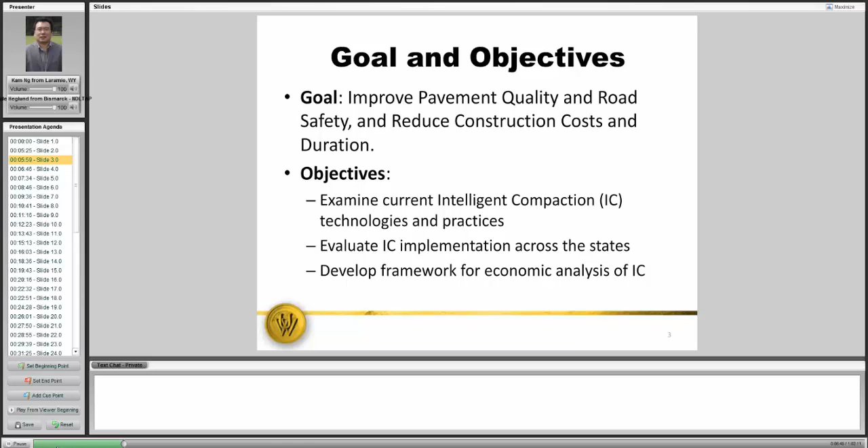A very brief background: current road compaction methods are highly operator dependent. Some of the limitations of current road compaction methods and procedures include that roller passes are often inconsistent, and as many of you know, current road compaction quality control and assurance is performed using a point load test method. The coverage of the quality control and assurance is minimal—I would say less than 1% of the roadway section.

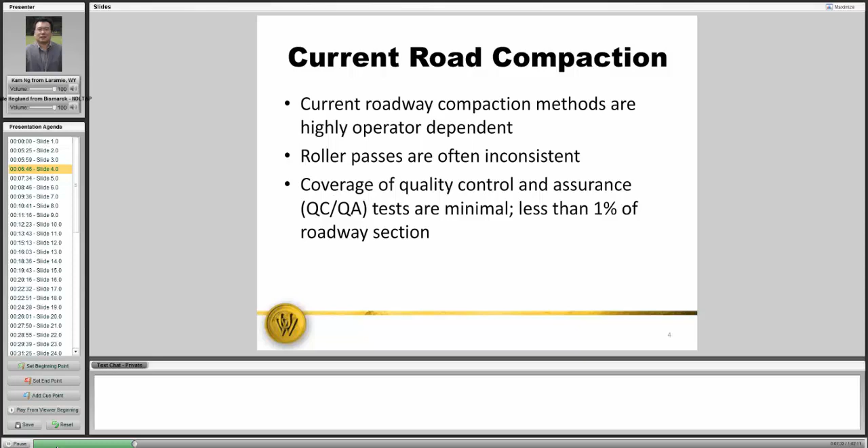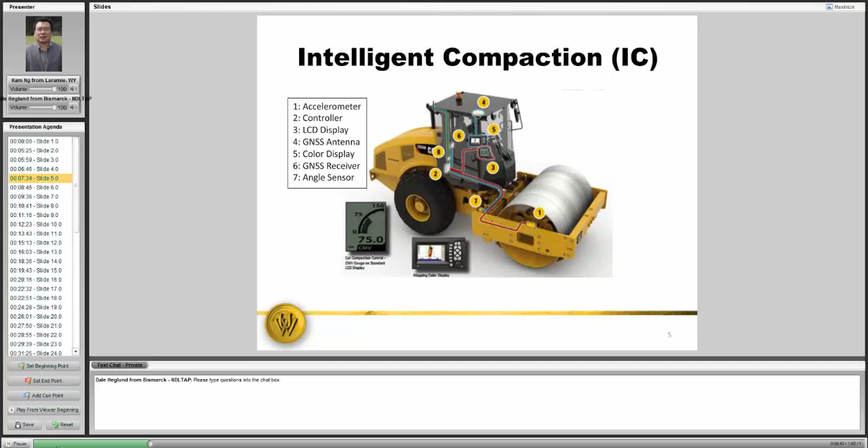So what exactly is intelligent compaction? In order to have an intelligent compaction, the compactor roller must be equipped or installed with the following features and sensors. Most important is an accelerometer that measures soil stiffness as the roller is compacting and rolling over a road section. We must also have a controller to adjust the compaction vibration, and have the data displayed using an LCD display, to locate the measurements at specific locations. We use a GPS system with a GNSS antenna to collect GPS information and overlap it with the measurements collected by the accelerometers, and that information is displayed. The roller could also be installed with angle sensors to measure rotations and positions of the roller.

Having these features and sensors installed onto a roller provides three main characteristics of intelligent compaction. The IC allows us to perform continuous assessment of soil and pavement stiffness. Roller operation will be automatically adjusted in terms of vibration amplitude and frequency, and the integrated GPS will allow us to have real-time mapping of the stiffness, as shown in the figure, where we were able to cover the entire area to indicate the measurement values at respective locations.

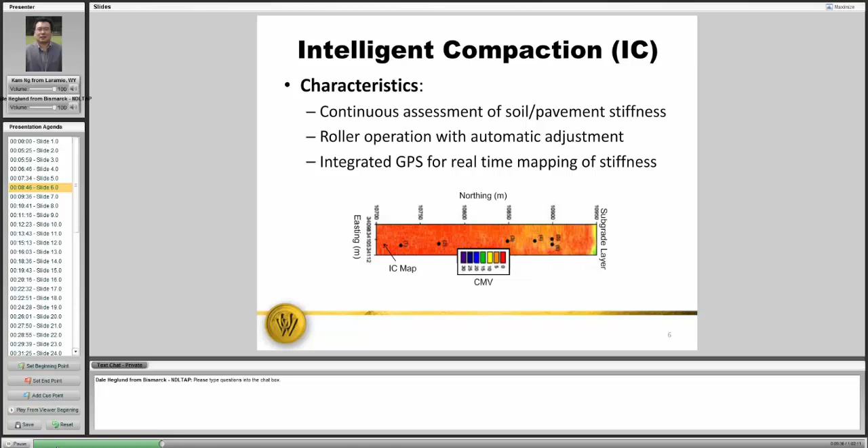Some of the potential benefits of intelligent compaction are gathered from the literature review of our study. Higher quality compaction, we believe IC will provide higher quality compaction, will improve construction, and most important is roadway safety, improve coverage for QA and QC testing, improve roller pass consistency, and reduce construction and maintenance costs as reported in the literature.

This figure shows what IC can do in terms of measurements compared with current compaction and QA/QC methods. IC is able to cover 100% of the compacted sections, whereas current point load test methods cover less than 1% of the quality of the road sections.

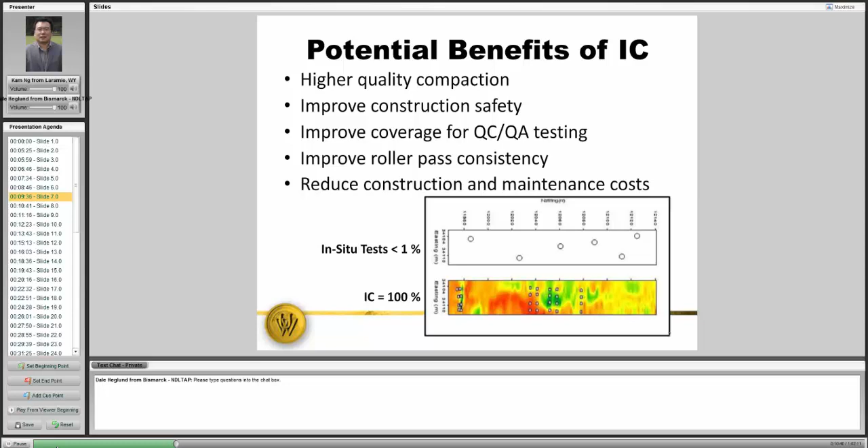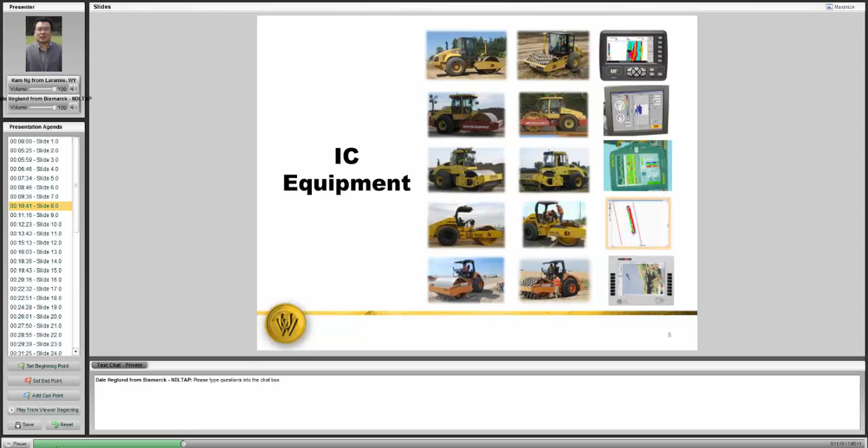This is not a technology designed by just one company; many different companies have their own systems, software, and measurement values. Some typical companies or vendors that provide this intelligent compaction technology include Caterpillar, Dynapac, Bomag, Sakai, and Case, just to name a few, and they have their own design, display features, screens, and measurements, as summarized on this slide.

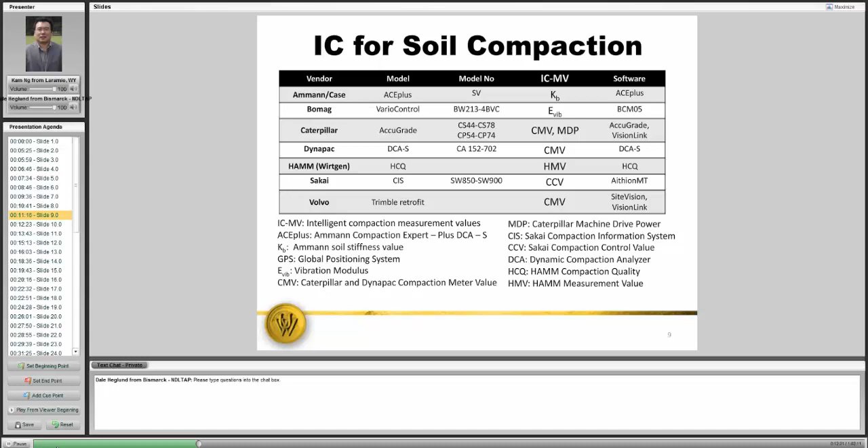A table shows different vendors, different models, and different software used to collect and process the data. Most important is the column under IC-MV, the intelligent compaction measurement values. The measurement values collected during compaction vary from vendor to vendor, but primarily measure the stiffness or modulus of the compacted soil or pavement material. The details of those calculations and derivations have been clearly and explicitly described in NCHRP report 676, so I will not get into those details here. This has been studied by many experts and summarized in the NCHRP report.

In terms of the compacted or influence zones under a compactor roller versus some of the typical point load test methods...

There's a question about maximizing the button above the slide to show the presentation full screen. Chris or Dale, would you be able to do that? Each person can do that on their own.

Okay, all right. In terms of the zones or influence depth, the compactor roller using intelligent compaction can cover a width of 2.1 meters, and a depth of 1 to 1.2 meters, whereas other point load tests, for example the LWD or FWD, will cover a depth of only 0.3 meters. Other gauges like the nuclear density gauge will cover a depth of 0.3 meters or 12 inches. For the DCP, of course, it's a point with no width, and the depth can go as deep as 3 meters.

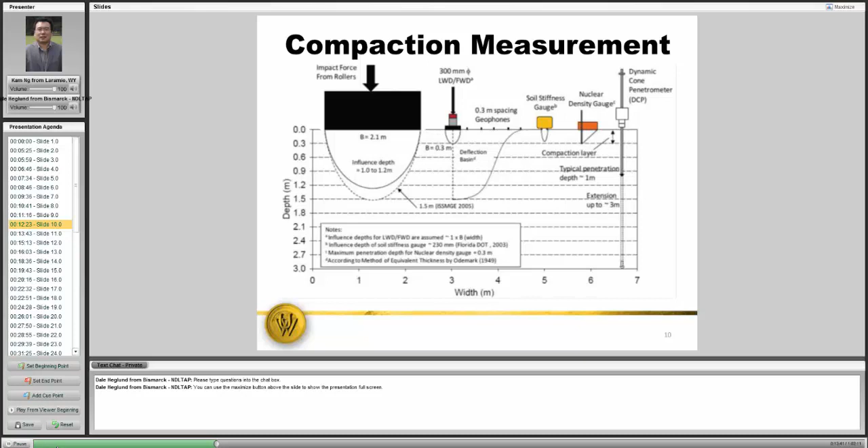So if you use intelligent compaction and collect a lot of data onto your onboard computers, how do you compile, analyze, sort, display, and process the data? You definitely need a data management tool, a program we call Veta software, funded by the Minnesota Department of Transportation and developed by the Transtec Group.

I've included the link at the bottom that you can use to download the software for free. Basically the software allows you to upload and download the data from the onboard computers on the roller down to your computer for analysis. With the data, you can generate a map of compaction data, perform correlations of the measurement values with in-situ test data, determine sections that meet the QA/QC specifications or target value, and better evaluate the performance of the compacted sections using this software.

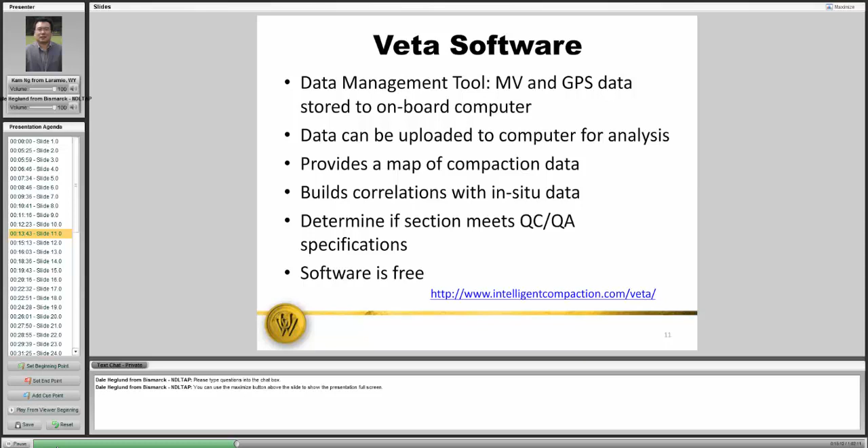So these are some of the outcomes of our study. Starting here with the current compaction specifications, as many of you know, today we still use some very conventional methods to evaluate compaction. For soil and aggregate layers, we typically use a nuclear gauge, proctor densities performed in the lab for reference, and sand cone as a reference test method. For pavement, we could have cores for testing, nuclear gauge, non-nuclear gauge, or electric density gauge for measuring and determining the performance of the compacted sections.

So what other DOTs have been doing with the implementation of intelligent compaction is using it as a complement to the current methods. They still use the current test methods like the DCP, sand cone, and nuclear gauge for their QA/QC, whereas IC will be used as a complement depending on the option.

There are three main options to integrate or incorporate IC into the QA/QC, described in detail in the NCHRP 676 report. The authors are Michael Mooney and his group, and David White and his group, among others who worked on that report that clearly describes all these details.

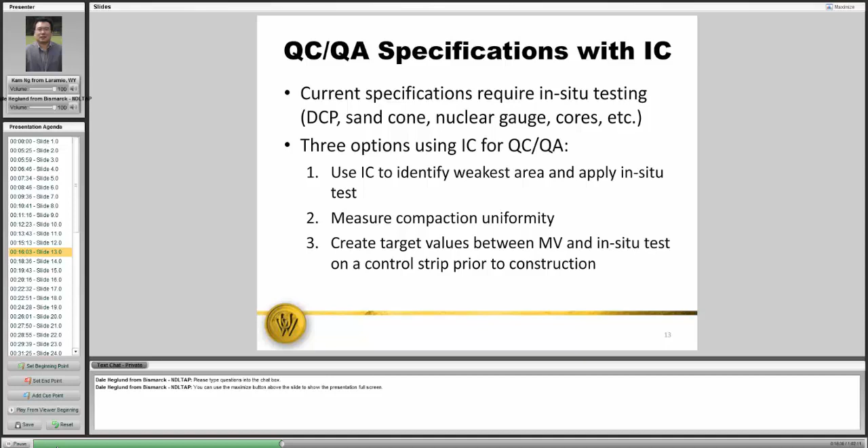So that's more extensive in option three, but you have a choice of three options to integrate and incorporate intelligent compaction into the QA/QC.

In terms of IC specifications, FHWA has developed specifications for use by transportation agencies, and at the time we conducted the research, these were being adapted into AASHTO specifications. I checked, and AASHTO has come up with specifications, which you can go to the website to purchase regarding intelligent compaction.

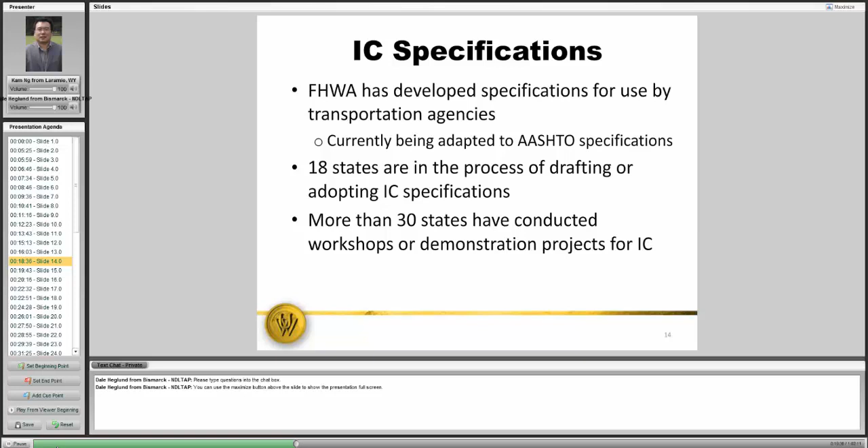As for the study, in 2014, 18 states were in the process of drafting or adopting IC specifications. I believe today there are more than 18 states. At that time, more than 30 states had conducted workshops or demonstration projects for IC. I believe today there are more than 30 states.

So we'll get into the research outcomes. First, I'd like to share the outcomes of the Wyoming survey, which had a total of 79 respondents participating.

We gave them a list of questions and answer options to choose from, and I want to bring up this particular question: do you have any concerns with IC or IC implementation? The answer options included cost, reliability of the data, reliability and durability of the technology, no specified quality control assurance method, lack of operator ability and/or time and cost to train operators, unfamiliar with the technology, no concerns, or others.

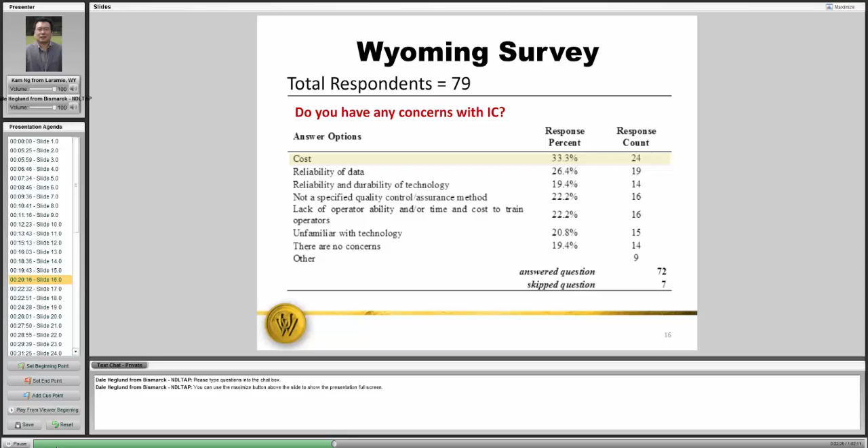This particular outcome is to understand DOT knowledge and use of intelligent compaction. The question was: which aspects of intelligent compaction is your agency familiar with? Select all options that are applicable. The highest percentage, 90%, meaning 27 out of 30 participants, selected that they are familiar with the technology used during intelligent compaction.

The next percentage is 76.7%, with 23 participants familiar with the operation of intelligent compaction rollers. Continuing, 56.7%, or 17 participants, are familiar with quality control and assurance standards. The lowest percentage is 50%, with 15 out of 30 participants familiar with costs and benefits. I want to highlight that they are least familiar with the costs and benefits associated with the use of intelligent compaction, especially the cost.

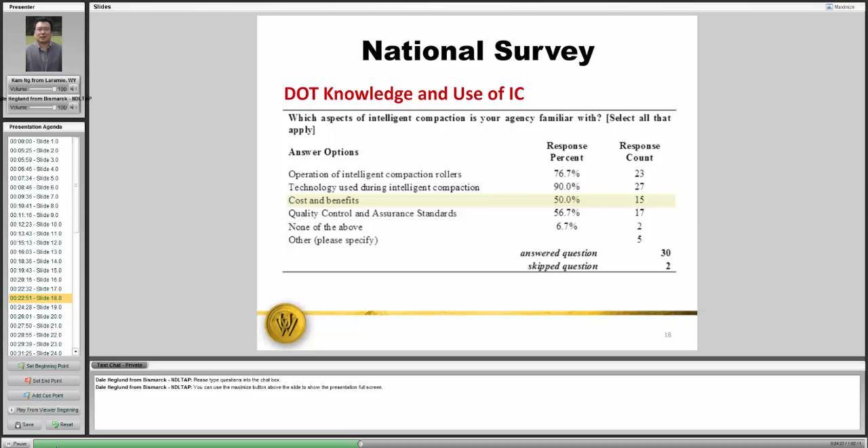Another question is to understand the DOT concerns about using intelligent compaction. The question was, does your agency have any concerns with the use of intelligent compaction for soil or pavement materials?

With 29 participants, the highest concern is 41.4%, which is the ability to have it approved as a quality assurance technique by the policymakers, and the lack of staff knowledge to confirm the data. These are the two highest percentages reflecting the major concerns with using intelligent compaction, followed by reliability of the data and the cost. Those are several other concerns with DOTs using intelligent compaction.

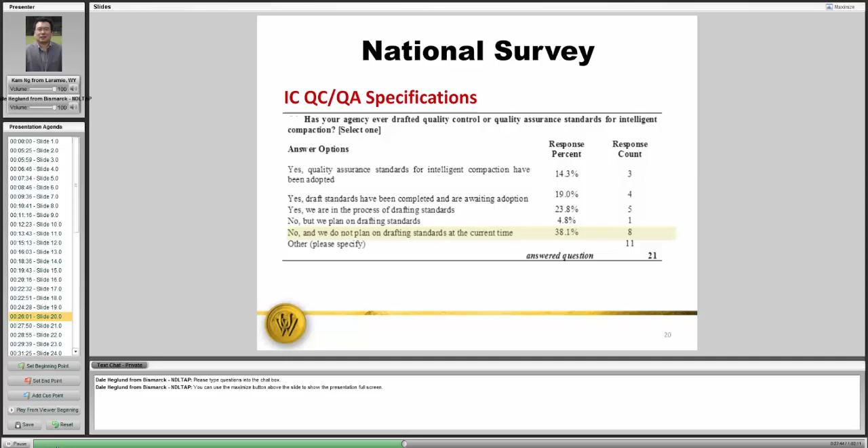But if you add up all the participants that answered yes, combining those groups, a total of 12 people say yes, but either in the process of drafting, adoption, or implementing the QA/QC specifications.

The first group, 31%, or 10 out of 32, believe that the cost will increase. The other group says they're not sure whether the cost will increase or decrease with the implementation of intelligent compaction.

From this outcome of the survey we understand that more than one third have no information or knowledge about the cost, and about one third of the people believe, or have information, that the cost will increase.

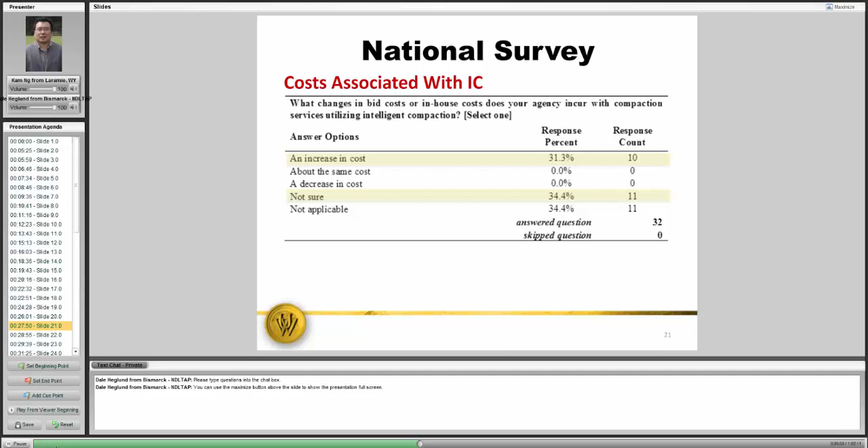Particularly regarding the cost associated with intelligent compaction, only 3 respondents mentioned information related to the long-term cost. So they have information on the long-term cost, and in particular one respondent from Texas indicated that over the long-term period, the benefits yield higher than the cost.

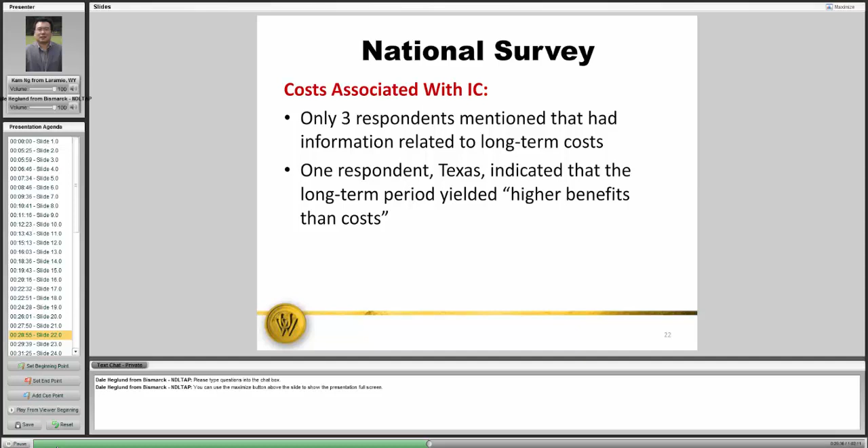That's good news for the full implementation of intelligent compaction, so we need to look not only at the initial cost but also at the long-term cost to be considered in our economic analysis.

Based on the outcomes of the survey, we understand that there are people concerned about the cost, and people with no information about the cost, and we think this is one of the major factors that will hinder the implementation or adoption of intelligent compaction.

We searched through literature and found limited or no studies on the benefits and costs associated with the implementation of intelligent compaction, and we felt this is an important topic to address.

So one of our focuses or objectives is to develop a framework for economic analysis of intelligent compaction, so that transportation agencies can use this as their basis or foundation for future investigations about the costs associated with intelligent compaction.

The framework addresses two main components: construction cycle and cost, and also the roadway life cycle. To present the framework and facilitate its presentation for economic analysis, we present two case examples to show how we use this framework to calculate the costs and benefits: case example 1, pavement overlay, and case example 2, new road construction.

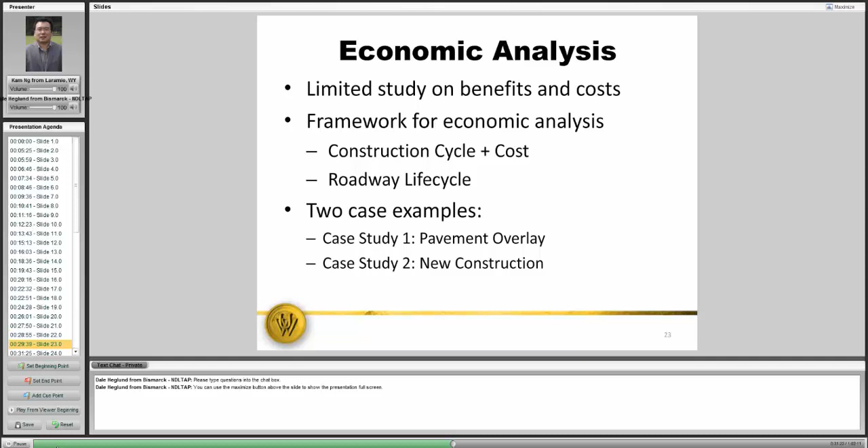Before I get into the framework and the examples, I'd like to define some of the terminologies or equations that we use in the calculations. Construction cycle is defined as the time period that begins with the preparation for roadway construction or compaction. So this is our definition for construction cycle.

For construction cost, we have an equation to determine the construction cost, listed as equation 5.1 in the report. Basically it is the compaction time in hours.

The compaction time in hours is multiplied by the cost of the roller per hour, plus the operator cost per hour, plus the GPS cost per hour considering the IC technology, and finally plus the QA/QC cost per area multiplied by the total area. This is the basic equation that should apply to everybody, because you will definitely have costs for the roller, operator, GPS, and QA/QC. That's how we define the construction cost.

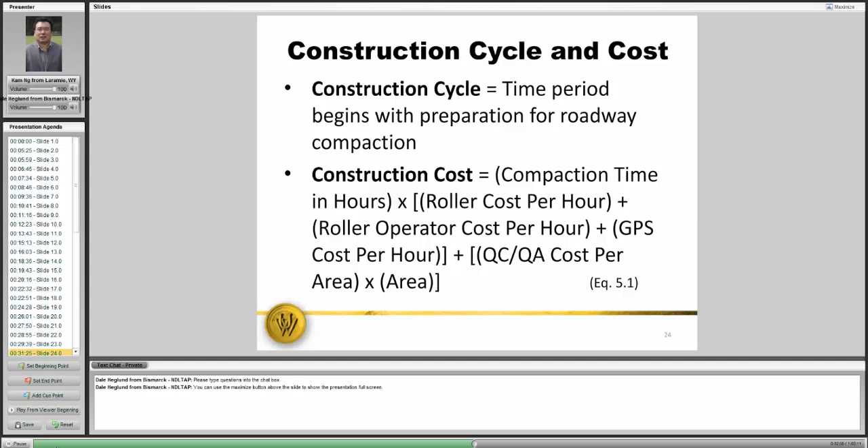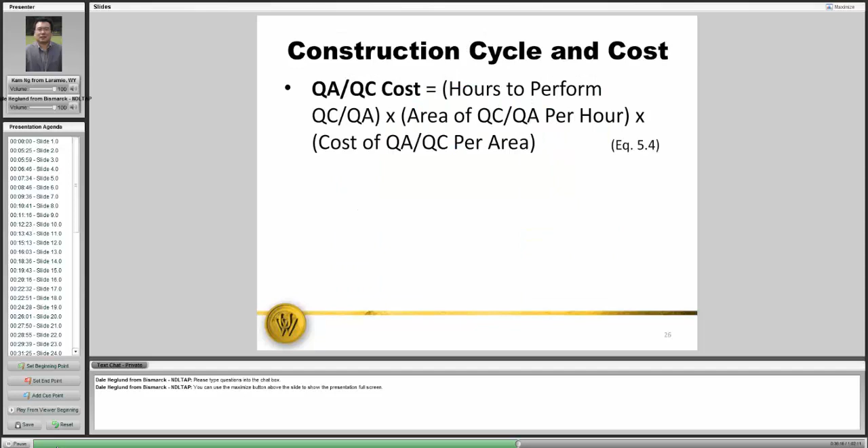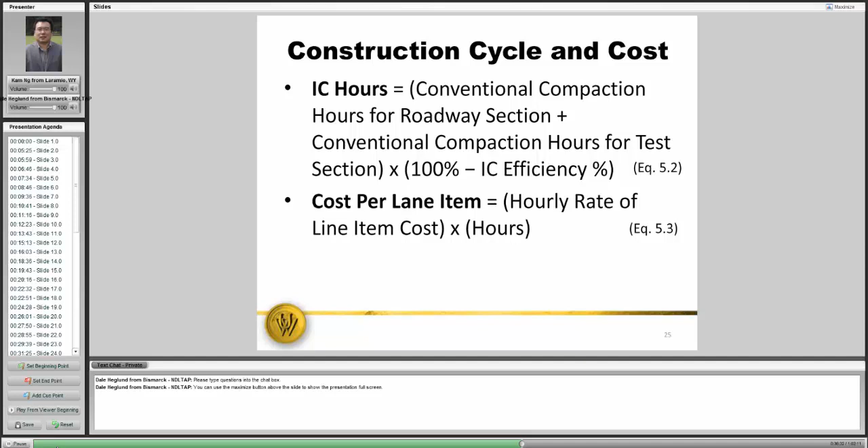To calculate the number of hours required by intelligent compaction for the same 1 lane mile, we need to use equation 5.2, which is the IC hours. The IC hours is the amount of hours required by conventional compaction multiplied by 100% minus IC efficiencies. That's how we get an equivalent number of hours required by intelligent compaction.

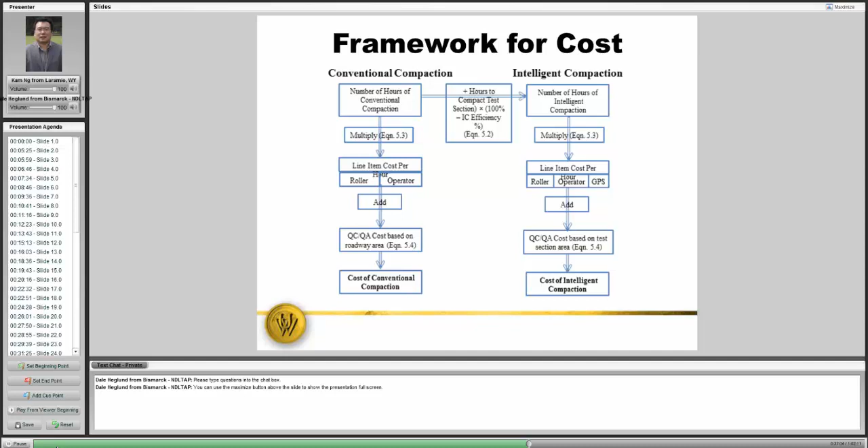Again, once we have the number of hours, we multiply by the cost for each line item, and we add the cost of QA/QC. That gives us the total cost required by intelligent compaction. So that's the flow chart that describes how we're able to determine the construction costs for both conventional and intelligent compaction.

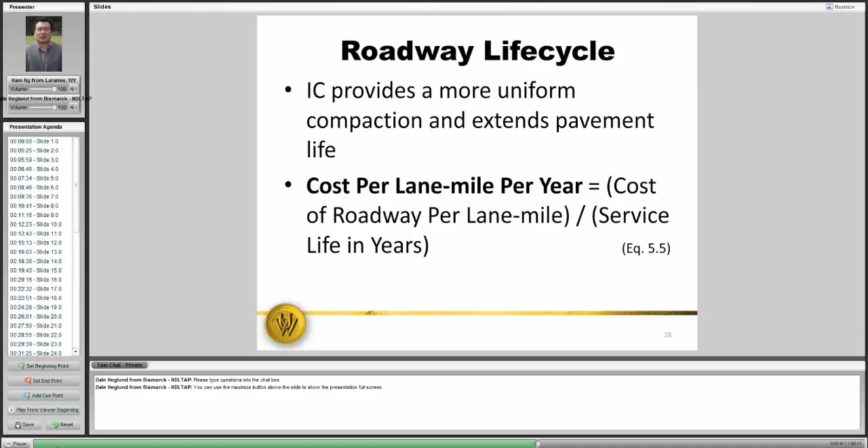In terms of the roadway life cycle, we also need to consider what would be the benefit, in terms of cost, based on the life cycle, the service life of a road. We believe that IC provides a more uniform compaction and will extend the pavement life. So the cost per lane mile per year is the unit used for comparison, equal to the cost of the roadway per lane mile divided by the service life in years.

So we begin with example number 1: a 2-inch thick asphalt pavement overlay, a single lane mile with a 500-foot IC calibration section. One of the challenges was to gather cost data so that we could perform the cost analysis for these examples. We gathered the cost data from companies, contractors, from Wyoming DOT, from equipment manufacturers and rental companies, and from literature, which allowed us to have enough cost data to perform the task.

Another challenge is to determine what will be the IC roller efficiency. We found this document by Briaud and Seo from Texas A&M, which concludes that the IC roller efficiency will be 30%.

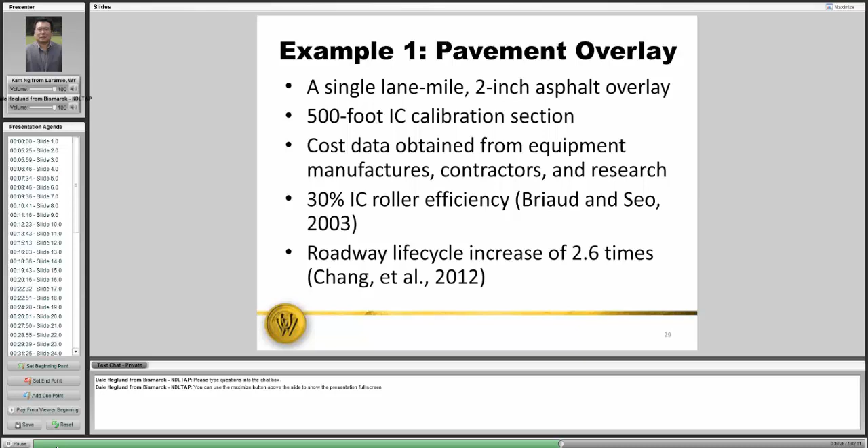The roadway life cycle compared with the roadway life cycle using intelligent compaction will increase by a factor of 2.6 compared to the roadway life cycle compacted using a conventional method. From Chang 2012, we're able to get this number to show that the life cycle of a road compacted using intelligent compaction will increase by a factor of 2.6.

Specifically, I want to highlight that the conventional roller cost for compacting a pavement layer per hour is $36. That's the number we come up with. The IC pavement roller cost or rental cost per month is $7,500. Roller operator per hour we estimated to be $30 per hour. That's the cost of an operator.

The amount of hours for performing the conventional compactions per lane mile is 10 hours. Compaction cost per square yard is 4 cents, and GPS rental per year is $1,800. We assume test sections of 500 feet, and we also assume 40 working hours per week. That will be the required cost data for construction cost estimations.

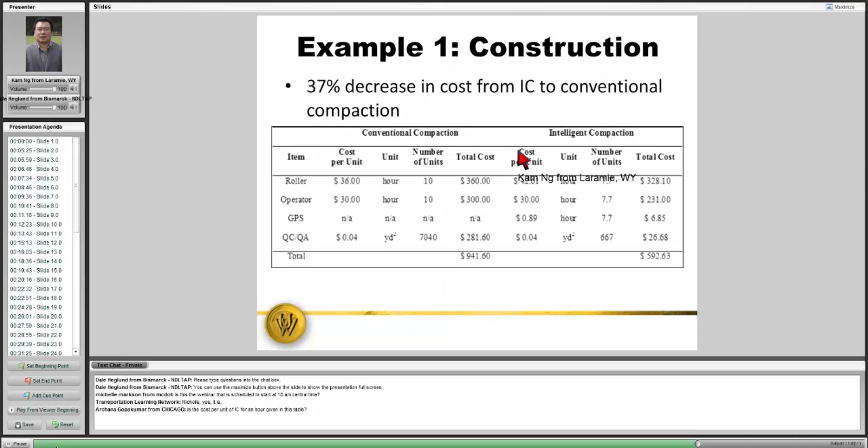Let me continue with the roadway life cycle. We gathered information from WYDOT and other agencies and estimated about $250,000 for overlaying a 2-inch thick asphalt pavement. So we take the $250,000 divided by the service life of the road, and we end up with $25,000 per year. That's how we calculate the cost per year associated with a 10 year life cycle.

If we use intelligent compaction, based on the Chang 2012 documents, they believe the service life will increase by a factor of 2.6. So we take 2.6 multiplied by the 10 years of the conventional method. We believe the service life will extend to 26 years if the road is compacted by intelligent compaction. That's how we get 26 years for the roadway life cycle.

Again, the cost per year takes $250,000 divided by 26, and that's how we get the cost per year. So if you compare the cost per year, we can say that we save about $15,000 per year in terms of benefit or saving using intelligent compaction.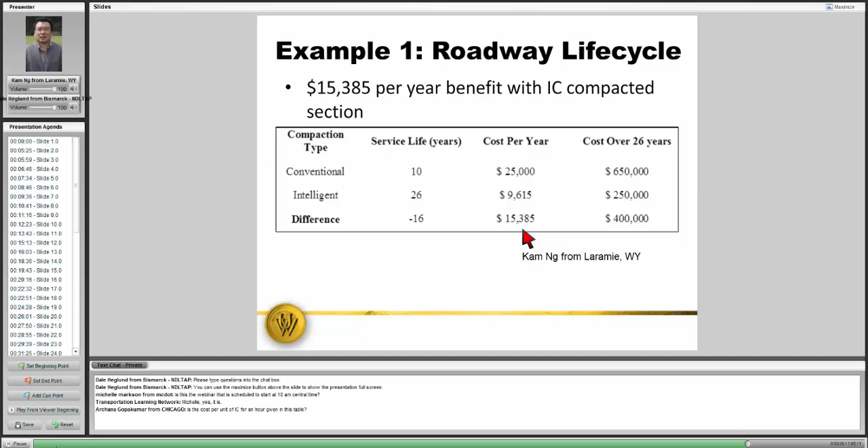So based on this study, example number 1 with a 2-inch thick overlay pavement, we have a saving of about $15,000 per year. But people may argue there are some uncertainties in terms of the numbers, the IC efficiencies, and the extended life cycle. So we did some sensitivity studies or parametric studies to look into a range of values.

In other words, if you don't have an efficiency gain using intelligent compaction, we believe you still have some savings, primarily from the QA/QC sections. If you assume you only do tests on the 500-foot test section using the point load test for establishing target values or correlations for the entire roadway, that is the saving you have using intelligent compaction. So even if you don't gain any efficiencies in terms of hours, using intelligent compaction you will have a cost saving based on this study.

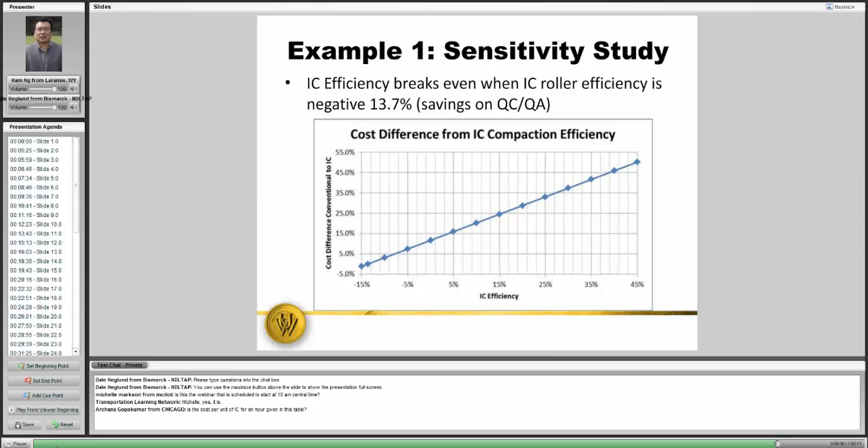The report also includes other sensitivity studies on roller compaction rate, on different extended life cycles, and on other parameters that we believe will change from place to place.

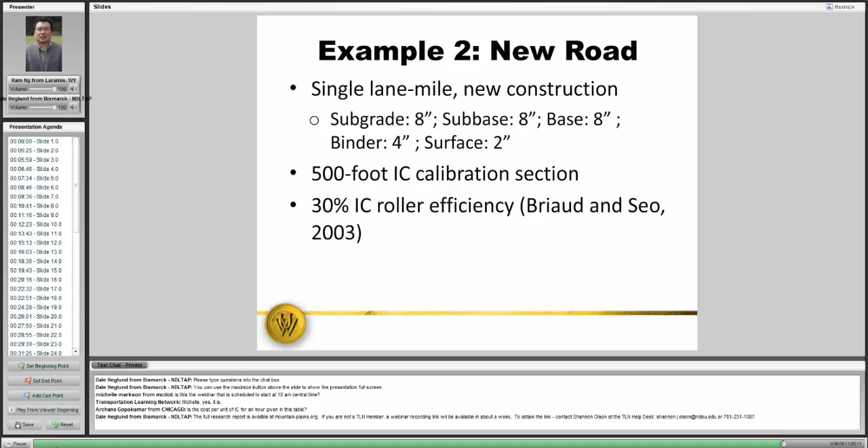Now we get into example number 2, where we have a single lane mile new construction. We have 5 layers here: subgrade, subbase, base, binder, surface. We have 500-foot IC calibration sections, and again we'll use a 30% IC efficiency here.

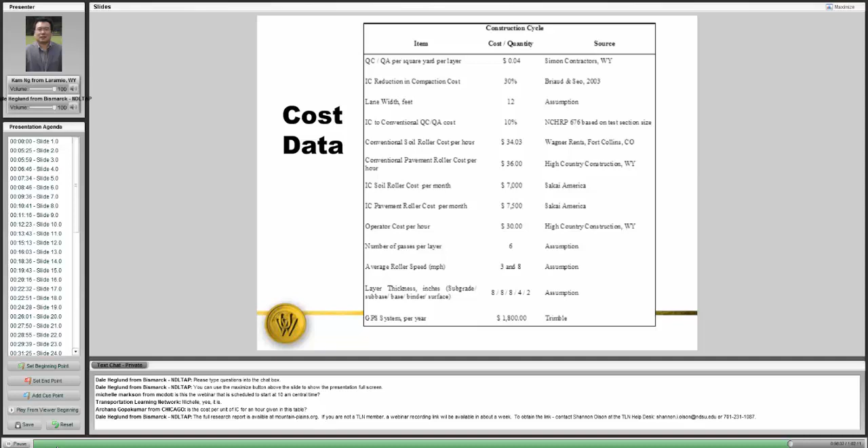This is the cost data we gathered from different companies. We want to highlight that the conventional soil roller costs $34.03 per hour, and the pavement roller is $36 per hour. The IC soil roller costs $7,000 per month, whereas the IC pavement roller costs $7,500 per month, and the rest should be pretty much the same. This is the outcome of the study in terms of the cost comparison between conventional and intelligent compaction.

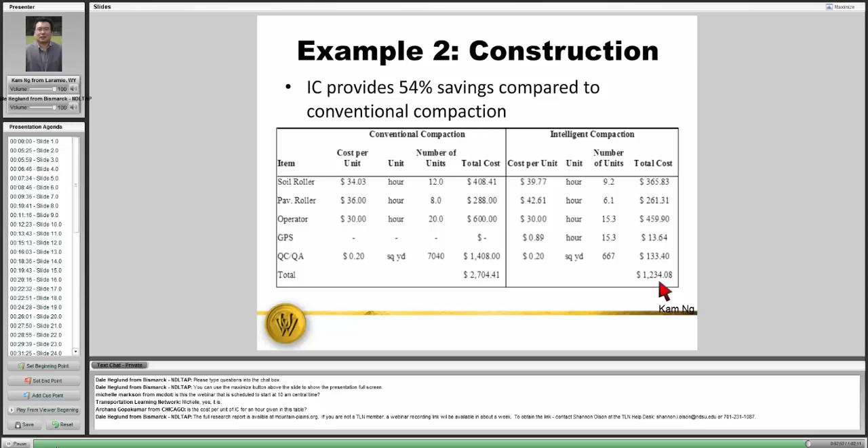We have 3 soil layers and 2 pavement layers, and the total cost for conventional compaction is $2,704.41. Whereas for intelligent compaction, we calculate the equivalent intelligent compaction hours, and we end up with $1,234.08. That is our cost using intelligent compaction. Based on this new road construction, we see more savings - about 54% savings in terms of construction cost.

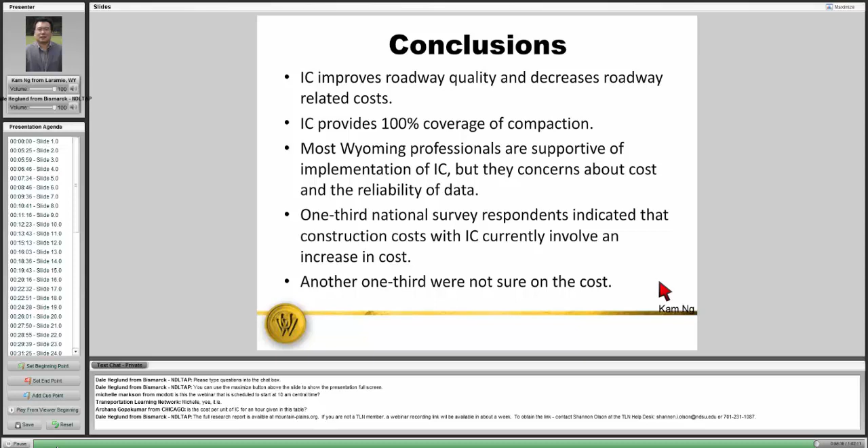So a few more slides to wrap up this webinar. Conclusions: we believe IC improves the roadway quality and decreases roadway related costs. IC provides 100% coverage of the compaction. Most Wyoming professionals are supportive of the implementation of IC, but they're concerned about the cost and reliability of the data. One-third of the national survey respondents indicate that construction costs using IC will increase. Another one-third are not very sure about the cost and benefit.

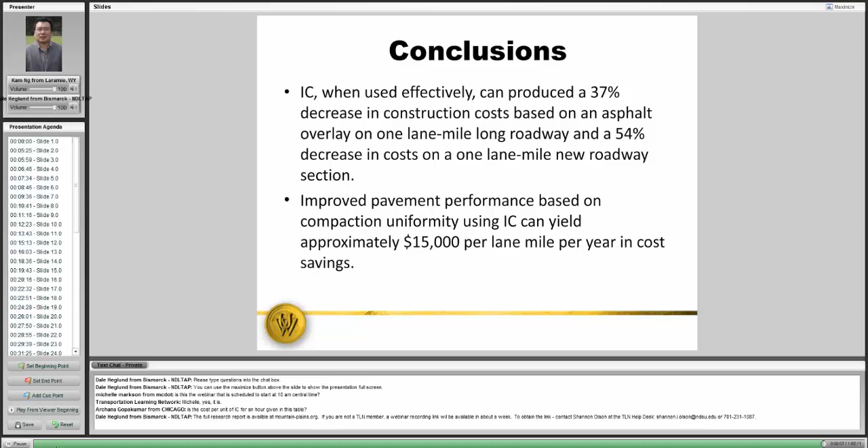IC, when used effectively, can produce a 37% decrease in construction costs for the overlay, or about 54% for roadway construction based on this study. Improved pavement performance will extend the pavement service life, and that will have a cost saving of about $15,000 per lane mile per year.

In terms of recommendations, if your state has not done a demo project, maybe you should consider working with the FHWA to secure funding for one or a few IC demo projects. Adopt IC QA/QC specifications during the demo project as a special provision. Analyze the QA/QC data from the demo project to evaluate the performance of the IC roller.

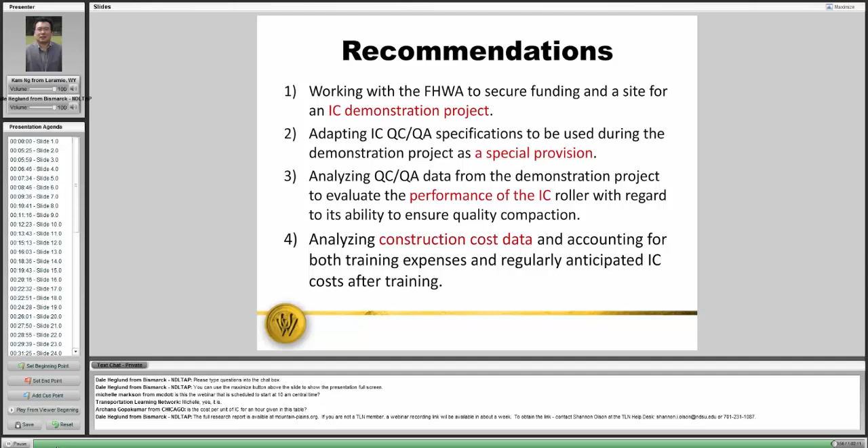Analyze the cost data, that is important, to account for both training expenses and anticipated IC costs after training of the people. Begin a monitoring program of the pavement sections where the demo project took place, so you can monitor the performance of those roads in terms of life cycle and better predict their costs over the years.

Prepare subsequent demo projects to confirm the results from the first one, and to test sections for the applications of IC. Maybe draft QA/QC for adoption by local or regional agencies to promote IC, and for contractors to follow, to facilitate implementation and improve roadway construction, cost, and safety.